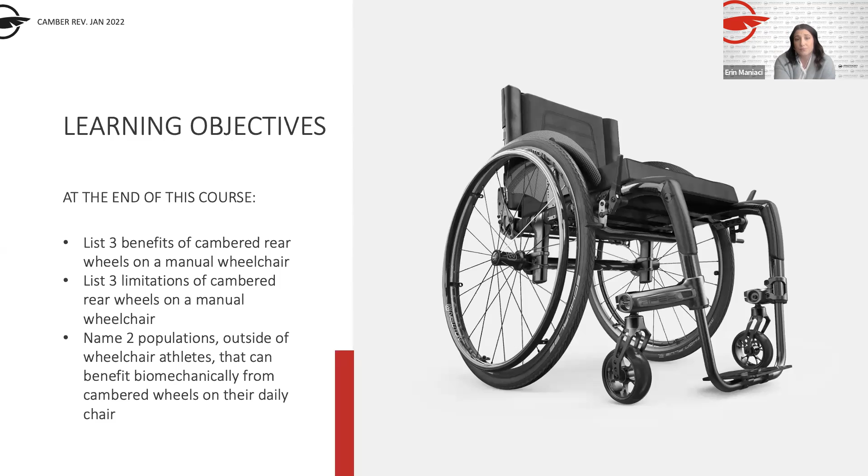So combining those with the patient value and the individual client need is going to bring the best practice for our client, specifically today in wheelchair prescription. So just want to know that everything we present today is rooted in research and evidence. But we want you to be able to extrapolate what you need from this information and apply it to your individual setting.

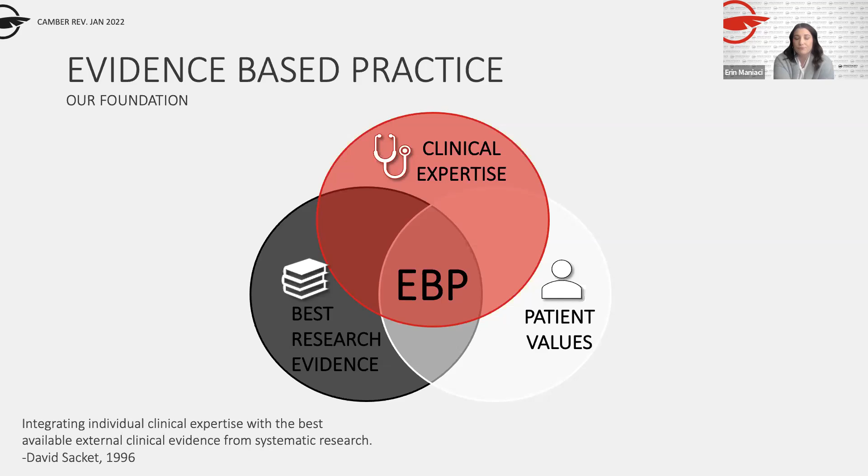So before we dive into Camber, everything that we're talking about is really to improve efficiency of the client in the manual wheelchair. And for the purpose of today's presentation, we want to assume that we already have a properly configured manual wheelchair. So that is in regards to width and depth. The seating is really honed in, the positioning of the rear wheel, the seat to floor height, caster size, all of those things we really have dialed into a particular client.

And then we're going to introduce Camber as another topic. It is just one component that plays into proper configuration, and we're well aware of that. So today we're just giving you some tidbits on how to interject Camber into that conversation. Okay, so seat slope, back angle, all of those things are really dialed in. And we're always thinking about shoulder health, shoulder preservation, upper extremity preservation when we're talking about manual wheelchair users. So the setup is very, very important, and Camber is just a piece of that.

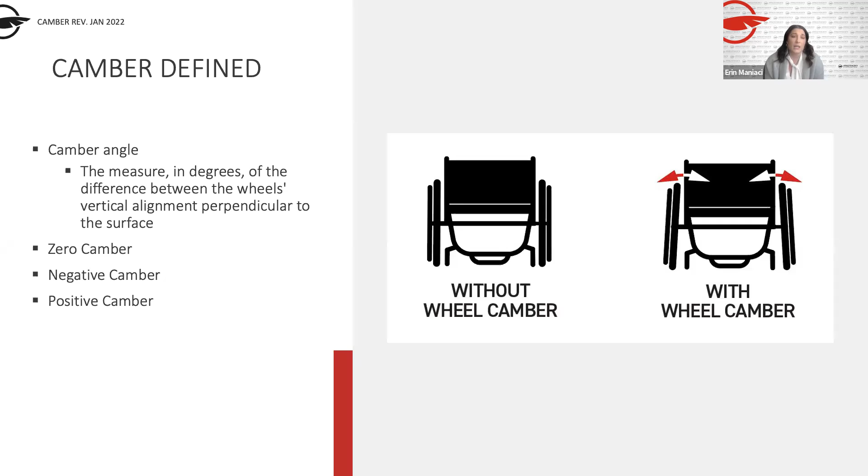In other industries, they will use what is called positive camber, and we'll get into that here. So negative camber is used in our industry in wheelchairs. It's also used in the automotive racing industry. Positive camber is used in all-terrain vehicles, construction equipment, really all to say that those different industries are going to use it to their mechanical advantage, to biomechanical advantage in our case.

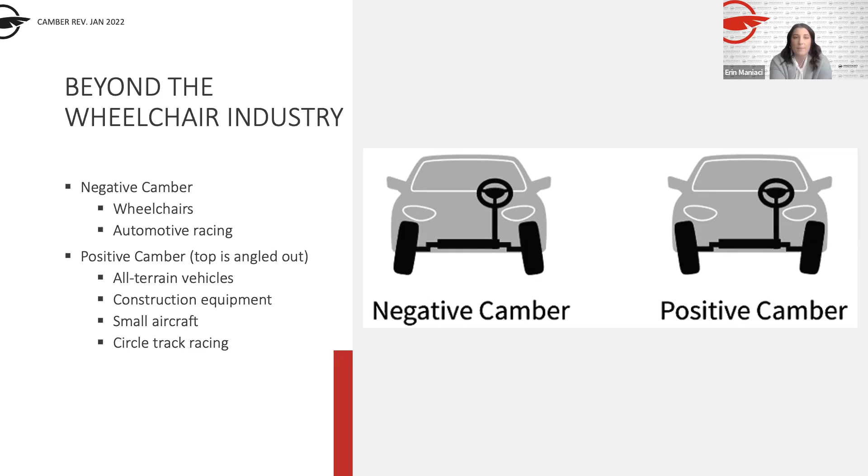Some people want less friction, some people want more friction. We can get into the physics of that, but not today, not during this hour. But just realize that when we are talking about our industry in wheelchairs, we're actually speaking of negative camber, even though the degrees are displayed positively, it's actually negative.

So within our industry, speaking in general terms, if camber is new to you or manual wheelchair prescription is new to you, everyday wheelchairs, kind of that average for a folding chair, can range from 0 to 6 degrees. Rigid chairs can range from 0 to 8 degrees. 2 to 3 degrees is common for an average user. Sports wheelchairs will go to that more dramatic camber angle, 15 to 24 degrees. Today, again, we're going to really focus on that everyday user.

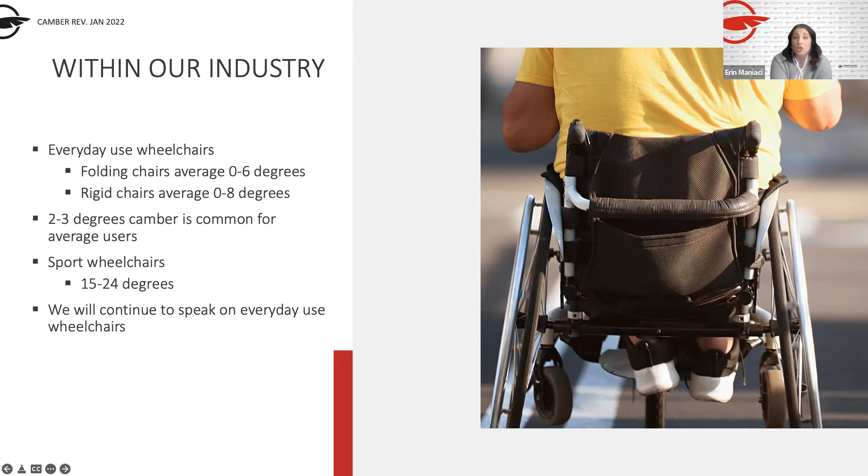But know that different manufacturers have different degrees of camber. Even though they range from 0 to 6, 0 to 8, some chairs are non-adjustable, so you pick your exact degree you want. Some of those ultralight wheelchairs are going to be adjustable, so you can adjust that camber down the line if you need. Some are going to come in even increments, some in odd increments. It really just depends on the manufacturer. So knowing exactly what you're dealing with when you are prescribing is important.

So, can camber be added to my client's wheelchair? First, not all categories of wheelchair have camber as an option. In the United States, we refer to it as a K5, ultra lightweight manual wheelchairs; they're the only chair that you can have camber on. For any of those lower level manual wheelchairs, camber is not an option. That's where you can start getting into the funding conversation. If you do need camber and want to utilize it for your client, we can use that as a funding argument, and we'll get into that later.

Again, not all wheelchairs can be modified after delivery if you don't have that adjustable option, but some models have adjustable options, so you can add that later. This can help you and your client decide what manufacturer to go with. If they don't know for sure and might want to add camber later, go with something that is adjustable down the line. Otherwise, maybe this is their third or fourth chair, they're super dialed into what they need for their function, so they know exactly what camber angle they want and don't need an adjustable option.

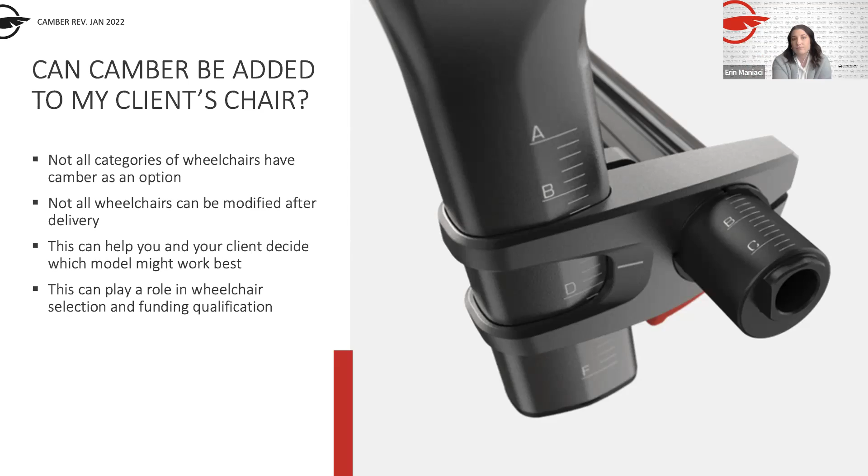So when you are talking about adjusting camber, ask your manufacturers what their options are, especially if they come in for a lunch and learn or you have a relationship with that sales rep. Ask them, is it easy or hard? What additional tools or parts may I need to adjust camber on these chairs? Manufacturers are going to have schematics and images like this on their website to help techs in the industry interchange camber tubes and plugs.

It's going to differ between the foldable and the rigid wheelchair. With a foldable, you can adjust camber through the axle plate or the axle receiver, whereas on a rigid wheelchair, they might adjust through a plug or an insert into the camber tube, or they might have you replace the entire camber tube itself. Again, manufacturers differ, and knowing the difference can help you decide what's best for your client.

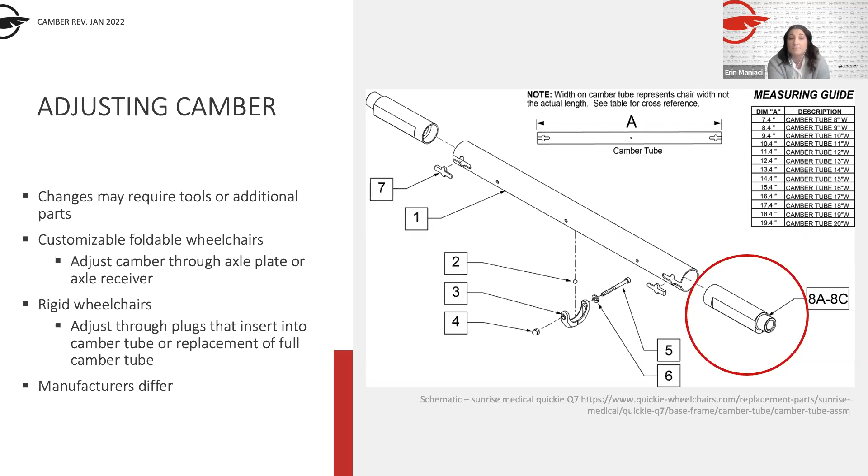So let's get into some of the benefits of camber now that we have defined it. Camber is going to give you an increased mechanical advantage. It puts that hand rim at a better position for a more natural push stroke by the user. It allows them to push down and out, so it improved body mechanics with that push.

We are in the business, if we're talking manual wheelchairs, ultra lightweight manual wheelchairs, of prevention of upper extremity injuries. We want to prevent that injury from occurring, knowing that almost 100% of manual wheelchair users, as research tells us, are going to be dealing with an upper extremity injury, shoulder injury at some point or another. So the more that we can improve mechanical advantage, improve body mechanics from the start, the better off we're going to be as we go.

We want more fluid motion with the upper extremities. We want to do proper training for propulsion to reduce shoulder strain over time. The camber and that angle is also going to just decrease overall shoulder abduction because it brings that wheel closer into the user. So the more things we can do to increase mechanical advantage, the better. Lots of benefits there. Increased efficiency noted as well.

So rolling resistance is going to be reduced, increased turning efficiency, especially at those high speeds, keeps your tire and your rim in alignment when you have camber. Thin, high performance tires are going to perform better with camber than a knobby tire or a thicker tire. This is something that we can certainly touch on as well. You know, camber is one aspect of component selection, but so are tires, so are hand rims, so are wheels.

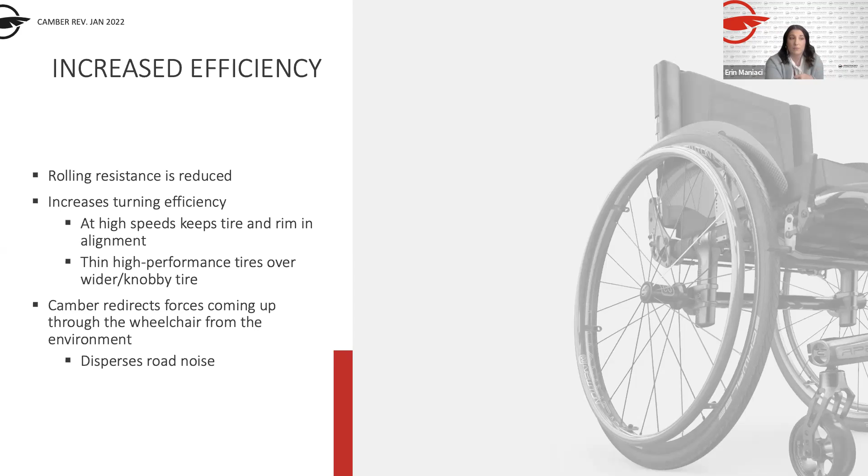As you get up above 9 degrees, then you can start getting a little bit more increased resistance, and that gets you kind of more into that sports world. But clinically, asking yourself, what kind of environment are they traversing? Carpets, tile, uneven ground, all of those are great questions to be asking when you're selecting camber or tires for that matter.

Another great clinical benefit is hand protection. And I think this is something that isn't really necessarily in the research, but certainly brought to our attention by end users and by clients. Because the bottom of the wheel is wider, it's going to contact a lateral obstacle before the user's hand and fingers. So a narrow doorway is a perfect example of this. That's going to save their hands.

Let's think about hand protection in terms of geriatrics, people with decreased sensation, just an average user with a history of injury. So those are great things to think about. And of course, in our geriatric population, our skin integrity isn't going to be as great as it once was. But also just thinking about our user and our client, they're relying on their hands for everything, propulsion, all of their ADLs, all of their movement throughout the day.

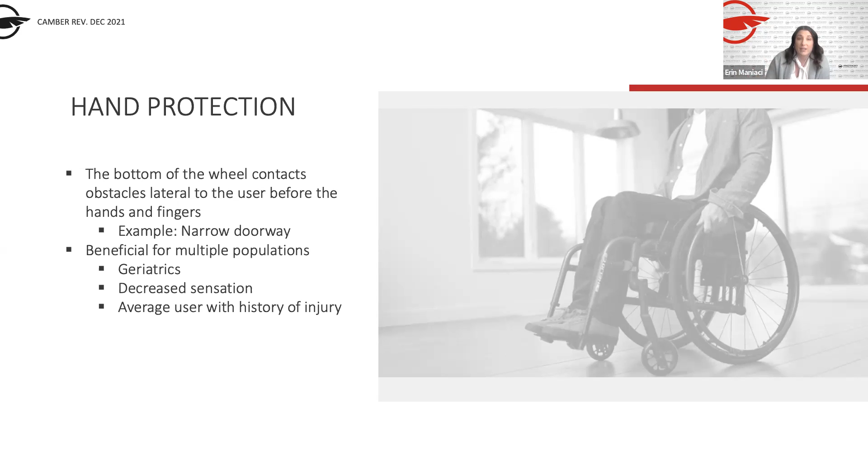So bumping their hand or having a cut or a bruise, that's going to affect them so much more than it would an able-bodied person. So hand protection is super important for these folks, and camber can give them that benefit.

Another benefit of camber is improved stability. It increases the lateral stability because it increases the overall footprint of the wheelchair in the width of the chair. So you can improve your navigation over lateral slopes or traversing lateral terrain. It improves your handling during frequent sideways movements. If you're, say, going up a steep slope and you need to take a rest, you can turn sideways without feeling like the chair is going to tip over.

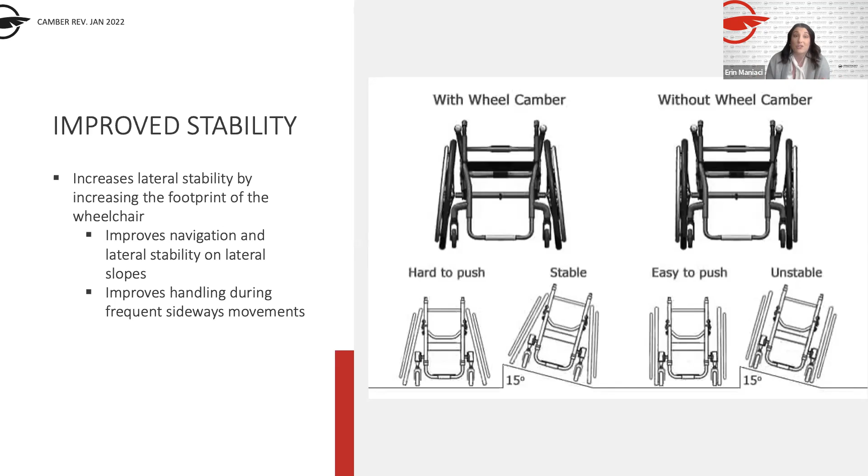But this brings up, obviously, probably the number one limitation of camber, right? The increased width. So that will lead us right into our limitations. Number one, increases overall width. So you can basically bet you're approximately gaining an inch for every 2 degrees of camber that you select. The overall bottom, again, is going to increase, not necessarily the top of the chair, but the bottom footprint's going to increase.

And then manufacturers sometimes will have what we call a width calculator or something similar to that effect on their website. So you can type in exactly the dimensions of your chair, and Christy will get into this later, but it can show your client, this is the things we've selected, this is how wide your chair is going to be, and then you have an exact number and they can go measure things in their home if they need to.

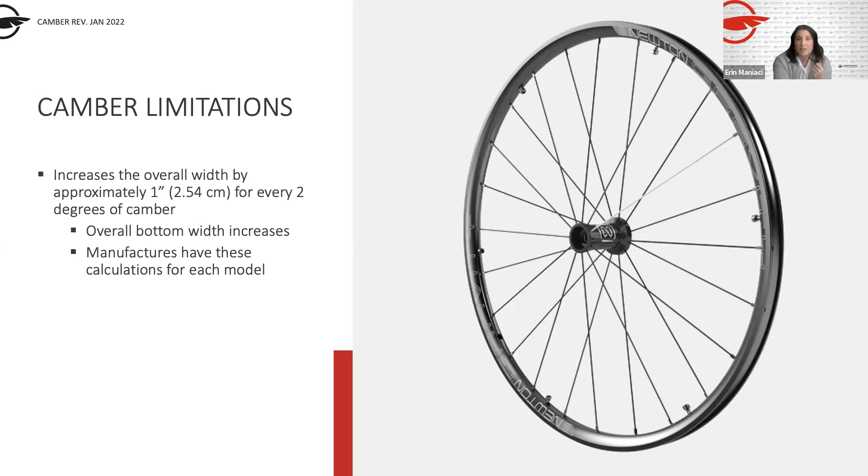Another limitation: excessive camber may cause the wheels to rub against other components of the chair, like the armrest or the side guards. So depending on how significant your angle with camber is going to be, know what other components you've selected to know if it's going to rub or get in the way of other components on the chair. As an ATP, you certainly want to recognize these things.

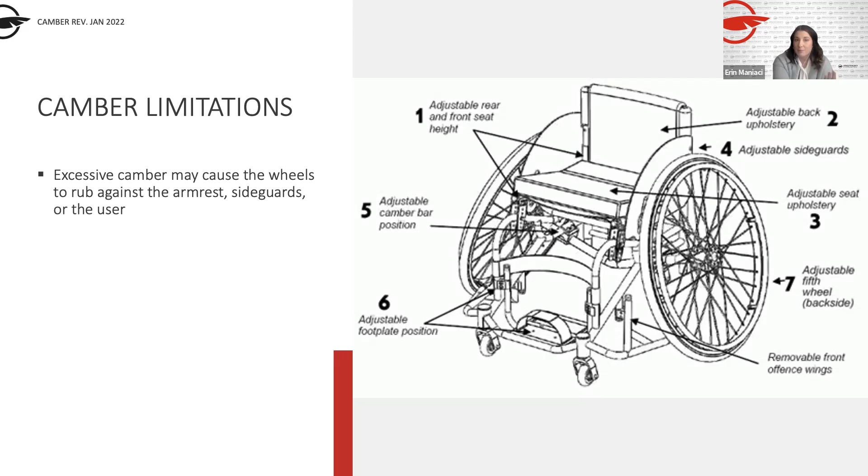As a therapist, you may not know the exact dimensions of everything, but manufacturers can also flag this as, hey, your camber angle is a little bit more significant than we've seen. So you may have issues with this particular armrest or this particular side guard. So the more you prescribe certain manufacturers' chairs, the more comfortable you'll get with knowing these types of things.

Another limitation, and we touched on this, is decreased surface contact area between the tread of the tire and the road. So sometimes you might want this, but sometimes this can become a limitation. So reduced traction, depending on the type of tire that you have and the degree of camber, can be harmful for some end users. It can also cause uneven wear on the medial side of the tire. It reduces overall traction. It can cause sinking into soft terrain.

So again, you're just having those conversations with your client. What type of terrain, what type of ground are you going to be going over? Knowing that more camber may actually limit them in certain areas. And if they're not going to be doing any of those soft terrain or things like that, adding a little bit more camber may be beneficial to them.

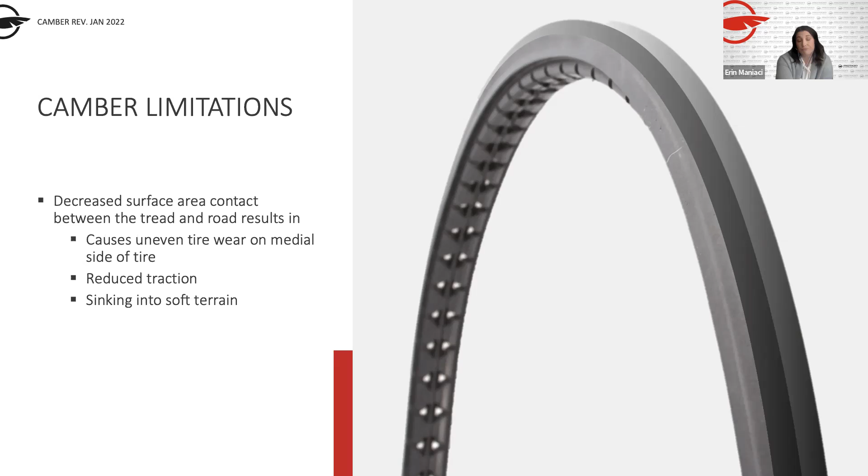Something that we really want to take our time on today and put out into our wheelchair industry is toe in and toe out. And we're specifically talking about wheel alignment here. This is something that is only applicable to a cambered wheel. So if you have zero camber, you aren't worried about toe in and toe out. So we'll define it and show you what it might look like clinically, to notice maybe I need to mess with the toe in, toe out and really pay attention to the wheel alignment.

But wheel alignment, as defined, is the parallelism of the wheels between them and that central line of the chair as viewed from the top. So we are looking at a bird's eye view of these 3 chairs here, A, B, and C. That dashed line through the middle is going to be the central line of the chair. So if both wheels and the central line are parallel, then you have no toe, and that's optimal for performance. It's when you get toe in or toe out that efficiency can be harmed.

What might this look like clinically? How do I sniff this out if I have a client that comes in and is saying things like, I hear something audible when I'm rolling across the floor, I have some scrub when I'm propelling. If you have any toe in or toe out, they might describe it as they can feel some drag. So this is one of the biggest adjustments that we can make for performance of the chair. Maybe your client isn't really that active, but they keep coming in and their tire is worn out very unevenly.

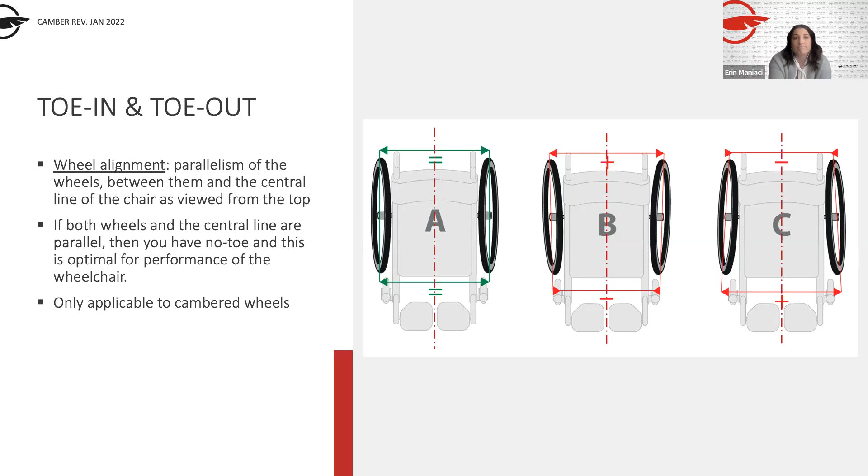So let's get into a little bit more definition. So this is an example of no toe. The distance between the rear of the tires and the front of the tires are equal. They might say rear wheel parallelism. That is very difficult to say. Proud of myself there. And it's really defined as within 6 millimeters. That can be categorized as no toe.

But if you talk to an end user, if you talk to a client, that typical distance between the two is like a hair of a toe in. So 1/32 of an inch, less than a millimeter. Okay. So very, very close to equal. 6 millimeters gives you kind of a wide range. But the central axis of the chair, that dashed line, that can be really hard to measure, especially with all the different components that we put on the chair.

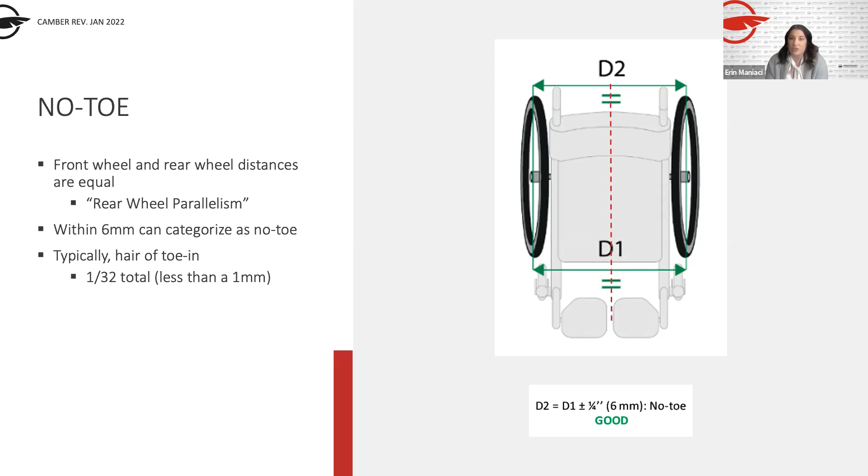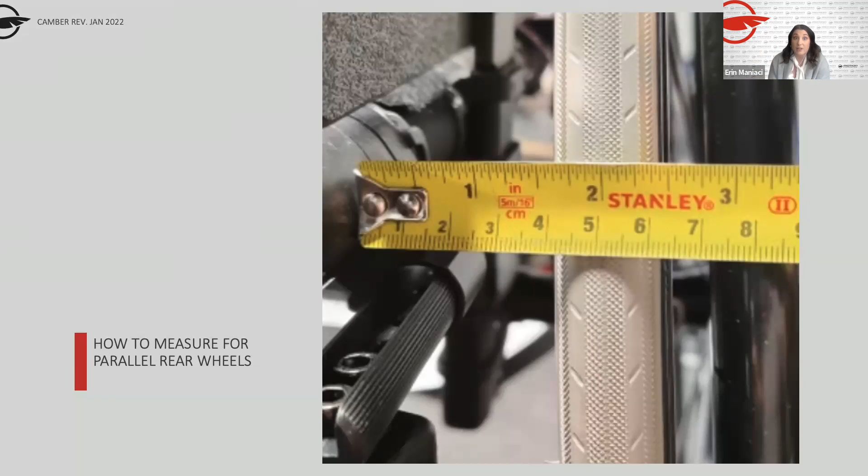So many will actually measure from the outer edge of the frame to the inside of the tire to compare the distances that way. So we have a picture here out in the field. If you're like, okay, how do I measure for toe in, toe out? This is a great way to do it. Again, outer edge of the frame to the inner edge of the wheel. You're measuring the front and the rear, and then you're doing the same on the left and the right sides. You're comparing left and right sides. And again, you want those to be as equal as possible, front to back.

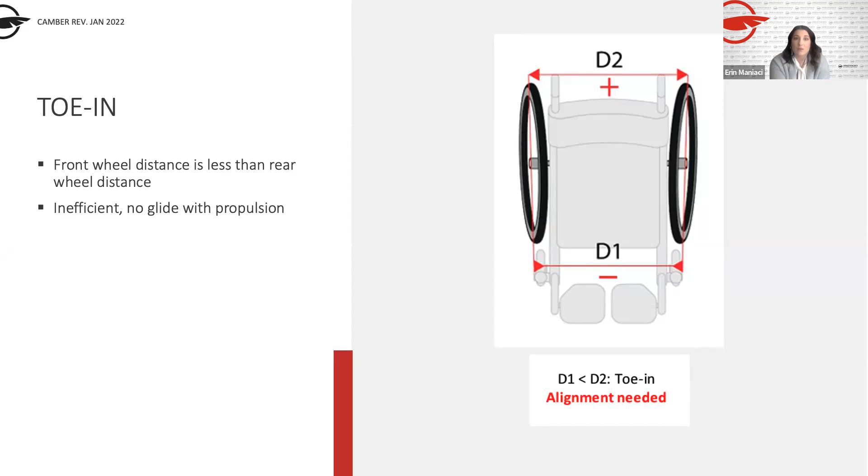When somebody's experiencing toe in, that means the front wheel distance is less than the rear wheel distance. This is inefficient. There's going to be no glide with propulsion. But if you're messing with alignment and you're going to err, you would want to err on the side of having a little bit of toe in over toe out. Toe out is just the opposite. So the front wheel distance is greater than the rear wheel distance.

And this picture, I think, does a really good job of showing that, because we can see the inside of the rim here on the back of the wheel. And ideally, the tire, this front tire, would be covering up the inside of the rim here. That would be an example of no toe. So here we're seeing toe out, definitely more inefficient than toe in. It's the slowest of the two. You're going to get the most drag, no glide with propulsion again.

But let's talk about toe out maybe in a little bit different light. So even if you have no toe, toe out can occur naturally when an end user or when your client is doing a wheelie. So a wheelie is a very normal wheelchair skill that your client may use when they're traversing down a hill. So going down big hills, not only does that wheelie provide some assistance with their trunk, and maybe they feel better doing the wheelie so they are not falling forward going down the hill, but it's also actually giving them a little bit of toe out. So that can be an advantage when traversing down a hill.

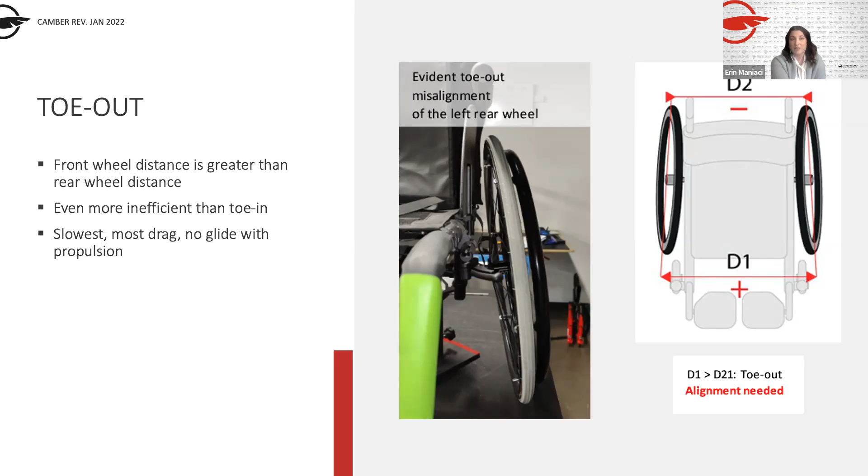And this just kind of gives you a background as to why that might help. So toe out is going to give you that added benefit of braking, giving you a braking effect to control your speed with descent. So even if you don't have toe out when you are looking at your alignment very carefully, toe out can occur naturally with a wheelie. And you might even educate your client to do that, to get some toe out for the braking effect.

So ensuring alignment, if you have a folding wheelchair, if you have a rigid wheelchair, and also again, depending on the manufacturers, it's all going to vary. For a folding wheelchair, ensuring that the axle bushings are the same length bilaterally. For a rigid wheelchair, ensuring that the camber tube is again symmetrical, looking at the axle bushings on that chair as well. You want to make sure they're the same length bilaterally.

Here we have just some pictures of what the camber tubes might look like when you're installing. Again, manufacturers will have technical manuals and instruction sheets on their websites to give you a very detailed description of how to realign their unique parts. But just a caveat, I would not mess with this if you're very new to alignment. I definitely leave this up to a dealer or somebody who knows their way around rear wheel alignment, because it can just be so specific. And if it's off, the client's really going to notice.

So with your plugs, if you're changing out a camber plug, they recommend changing one at a time, aligning one with the chair center line. Again, that dotted line that we showed visually a couple slides ago. As long as one is in alignment, then at least that one will stay consistent to avoid pulling to one side. So they recommend not doing both at once.

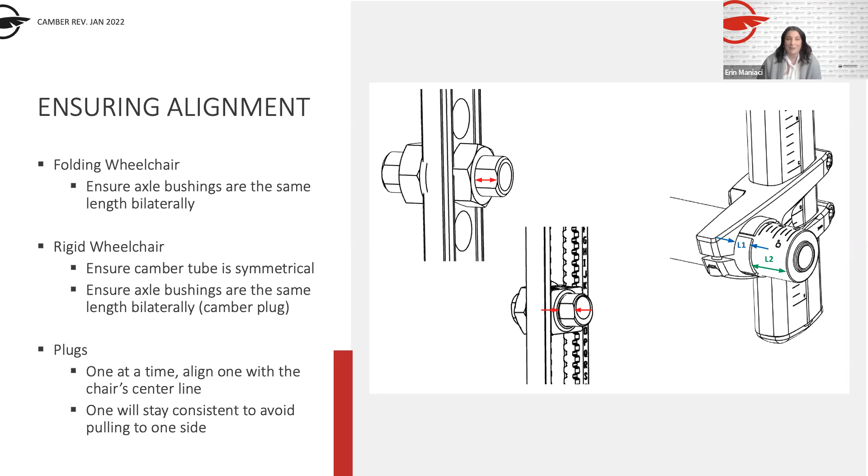So I'm going to hand it off to Christie. She's going to talk a little bit more about some science stuff. I know we did a lot of defining in my portion, but then she's going to talk a little bit more about reality and how we can apply this to our end user. So thank you so much.

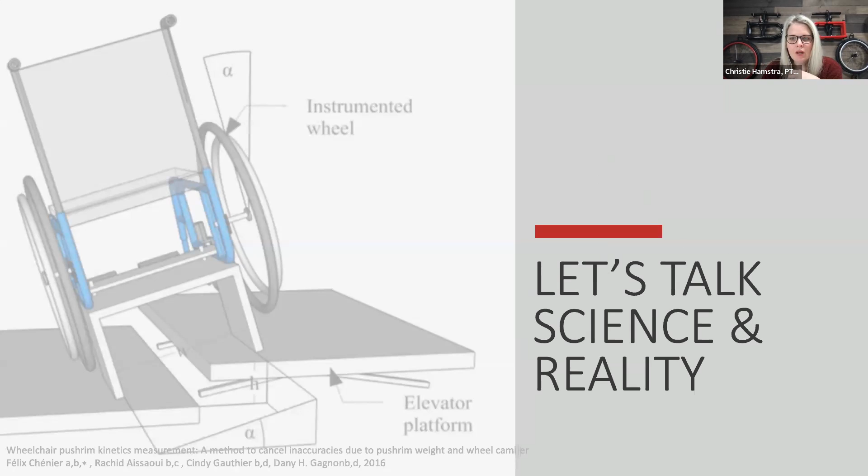Thank you for giving us all that information, Erin. We're going to look at some of the real world examples of what we're doing now that we've gone through a lot of what is out there in camber. So we spent a lot of time looking at benefits and limitations, trying to figure out camber for everyday chairs, right? So we can say that there's improved mechanical advantage, improved efficiency, improved stability. A lot of this is coming from the research that's been done on athletes, okay?

There is limited research on camber in everyday chairs. So then you're asking, okay, you said you're research-based, where did you get your research from? Well, it has to be extrapolated, right? We do that because there isn't always something specifically researched on the process that we're doing. And so it's important to see what is out there and read it with some discretion. A lot of the studies consist of subjects that are either able-bodied or wheelchair athletes, or they have a very small number of participants.

So if there's any researchers out there that are like, hey, I want to do something on wheelchairs and camber grabs your fancy, go right ahead, message us afterwards. I'm sure we can hook you up with somebody willing to do some research looking at camber specifically.

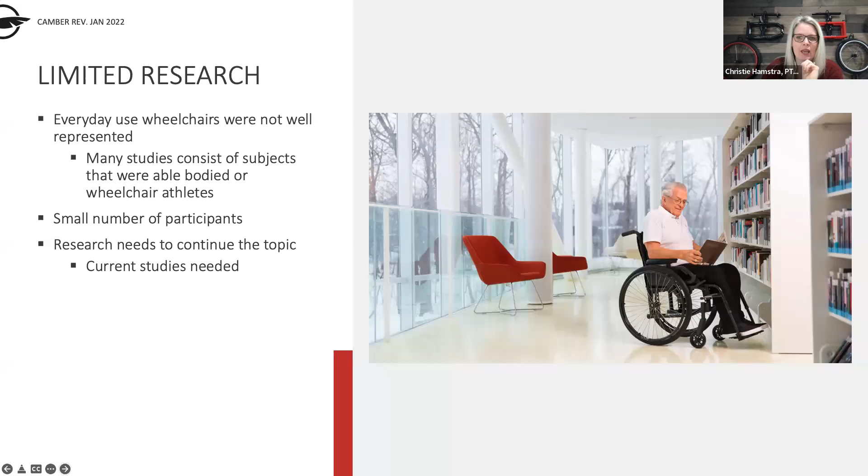Okay, so one of the main studies that looked at camber in everyday chairs is this one here that we're just going to discuss briefly. Again, I don't consider myself a researcher, but we're just trying to discuss what is out there so that we can help our clients make the best decision that we can. And I like this one because they did use disabled experienced wheelchair users, non-disabled experienced wheelchair users, and then non-disabled inexperienced.

So there was a wide variety. They looked at 0, 3, and 6 degrees of camber. They had them rate stability, maneuverability, comfort, overall preference. And it was very interesting to see. They also had the clients do ratings of perceived exertion and looking at VO2. And so they didn't find any differences in those cases. So they didn't see any differences in ratings of perceived exertion or in their oxygen uptake.

Everyone said that they liked 6 degrees of camber. So it really came down to patient preference. And so I think, when you're not dealing with a lot of increase in rolling resistance, we're not going over that 9 degrees, it's okay to maybe let our clients try a few and decide what works for them. Before you get all up in arms, I promise you, I'm not saying that every supplier and every rehab facility has to have 6 different chairs with 1, 2, 3, 4, 5, 6 degrees of camber.

So we're going to start with who benefits from camber. So Erin did a great job of going through the benefits and the limitations. And we really want to see who's going to benefit from that. Okay, so the next several slides are a little bit more wordy, but we're leaving it there so that you can have it as a resource to help you maybe justify for a specific population. But who does benefit? We've got the average user. In a minute, we're going to really look at that average user and kind of dive into that terminology.

The athlete, I think it's pretty obvious. Anyone who thinks of camber, I think first of all, of athletes. The aging client, I think often underserved could be the aging client, especially in this ultra lightweight manual wheelchair category. The pediatric client, we'll talk a little bit about that. And then the pear-shaped client, quite typically a female client, but again, just a pear-shaped client. So we want to look at all of that and see how each one of these different populations can benefit from adding a little bit of camber into their wheelchair.

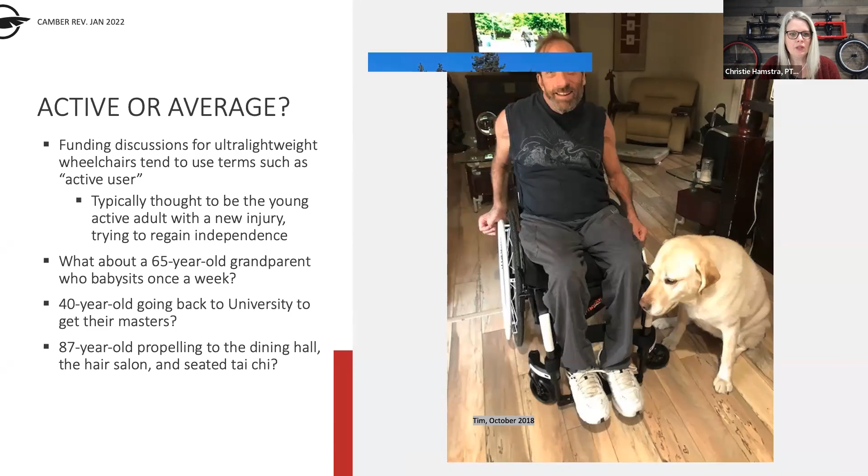I do think sometimes, maybe not us, but often our funding sources hold wheelchair users to a higher standard for what they consider active. And I think we need to continue to advocate and push so that our clients have better access to the equipment that's going to help them. Soapbox, I apologize. So then let's talk about athletes.

Okay, so you start getting into that 15 to 24 degrees of camber. It's typically seen on athletes' wheelchairs. So there's greater forces. So the same benefits and limitations don't apply. But let's come back and critique it, right? Let's do some constructive criticism on it.

The greater forces on the upper extremity and the greater energy expenditure they have to put out doesn't really matter as much, because they're only using the chair for a specific amount of time, for a specific activity, for a specific purpose. So yes, it is going to be higher forces in the upper extremity when you've got the chair out at 24 degrees. But they have trainers and professionals and all these

biomechanical engineers. There it is. It just wasn't coming out.

Sorry. And so they're looking at this, and this is why everyday chairs are not sports chairs. Understand that athletes' chairs are very sports specific. Your client who's playing a court sport like basketball or tennis is not going to be the same as if they're doing track and field or racing. And we are not here to talk to you about what is recommended for athletes' chairs. We're here to talk about everyday chairs, but it is a population there, and we want to ensure that we are giving them their time.

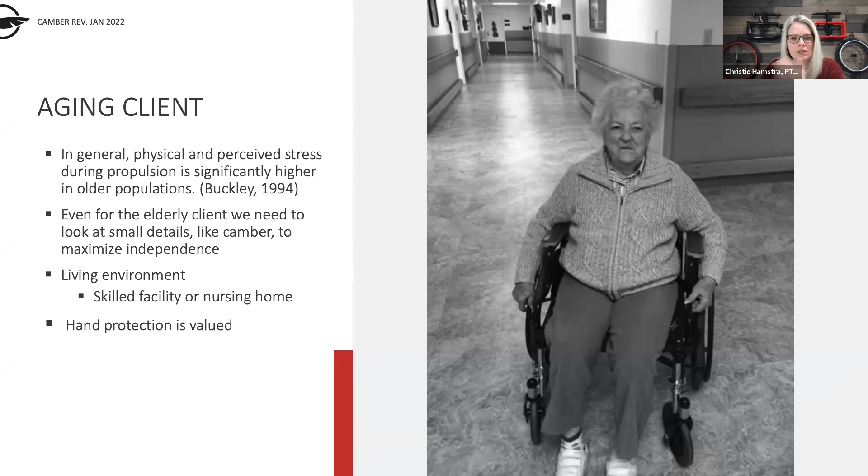But again, let's just think about all of these things as we continue to move. So this is our geriatric client. Now let's talk about pediatrics. We're going to swing back to the other end.

We could have many conversations about making a chair that grows with the child versus fitting the child. But let's just bring it back to every bit of additional width that you're building into that chair for that kid to grow into is making them less efficient with their propulsion, right? Because their arms are coming out, they're in more of an abducted position. So they can start losing their propulsion efficiency up to 10% for every additional inch that we're putting in there.

So camber, if you add in some camber, it's going to allow them to have better access to those wheels. And think about it, you can add a little bit more camber into maybe a pediatric wheelchair because they're already smaller to begin with. So doorway access, some of that isn't as much of an issue. Another thing that we think about with pediatrics is turning. Sometimes it's challenging for young self-propellers to learn and figure out how to turn. So having those wheels in a cambered position to make it not only easier to access, but easier for turning is going to be very, very important.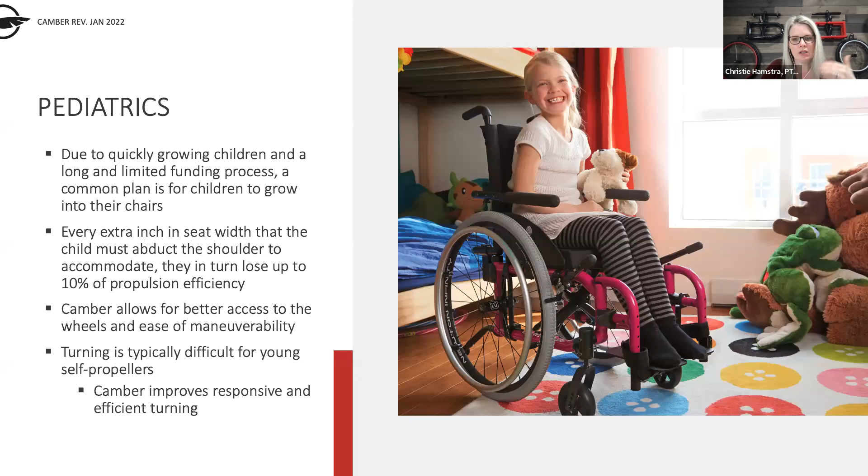So we have to be careful with this, right? Because again, while we are trying to bring the hand rims in so that the client has a better position so they're not out here, we also have to understand that we are widening it at the base. So you have to make sure that you're using all of the tools that are out there with manufacturers, et cetera, to ensure that you're getting the best possible setup without being too wide for their environment. So again, keeping that in mind as you look at specifically gender and body composition.

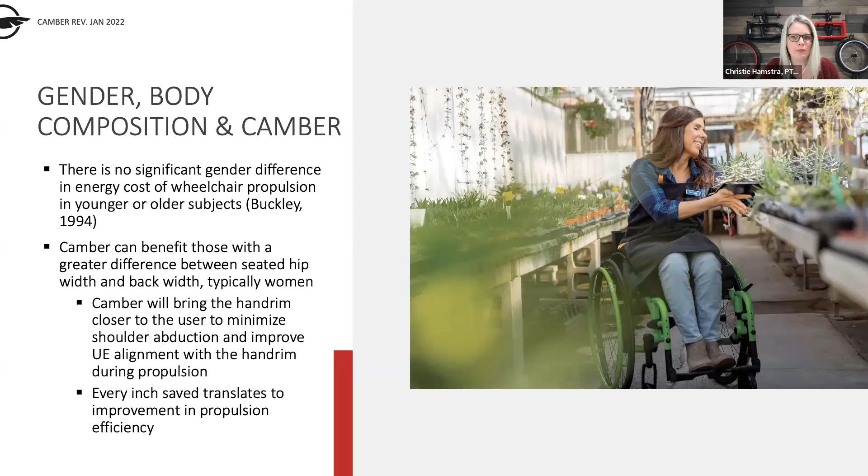So let's kind of break it down. We looked at some specific populations, but when we're in that wheelchair evaluation, what are the real considerations when we're selecting camber? So I think we've really hit on ease of propulsion, right? And upper extremity alignment with the hand rim. So again, getting those wheels in closer, getting a better, more efficient propulsion pattern is really going to be good.

That lateral traversing and inclines. I'm going to give you an example of one of our end users who shared some stuff with us specifically about that. But again, turning on inclines, ensuring that they're going to feel stable and they're going to be able to do all of the things that they want to in that environment.

Client preference. The one study that we looked at with everyday users really said it came down to client preference. And this will also come down to manufacturer preference. Well, maybe my preference is 3, but the manufacturer I work for or that I'm selecting has 2 and 4, right? Or maybe I want 2 and I'm only allowed to have 3. So again, understanding that client preference is one thing.

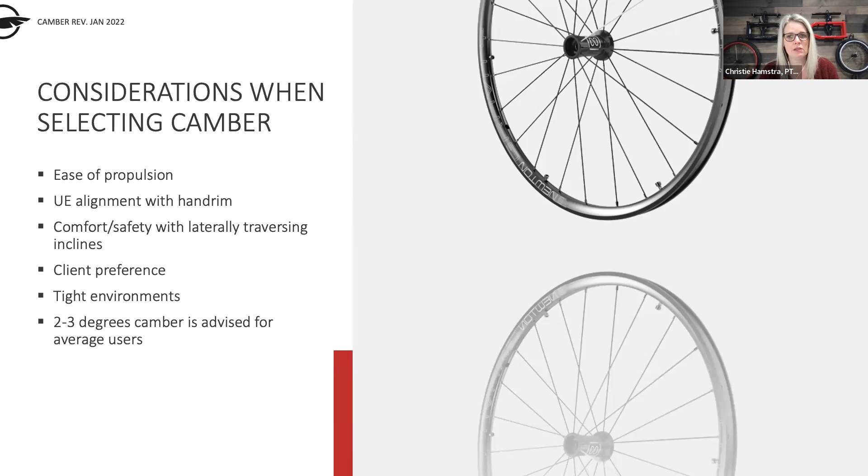2 to 3 degrees of camber is kind of the average, what a lot of people will tell you, a lot of ATPs who've worked in the industry, a lot of ATPs who are users who have been in the industry for a long time, that's what they'll say. But you also have to look at tight environments. And so camber, while it's going to be great for maneuvering, if you are in a really, really tight space, maybe that little bit of camber is going to make your chair too wide for that space. So we can talk about that here in just a minute as well.

So client education and trials. Again, I don't want any ATPs that are in here to start getting upset when I say we should have some to try. That's not what I'm saying.

When I was speaking with an ATP colleague as we were building this presentation, and I said, here's the name of the presentation, he goes, oh, so you're going to talk about how 1 degree is great, and then 2 degrees is great, and then 3 degrees is great, and then 4 degrees? I said, absolutely not. I think people would be like, please stop. I'm going to watch paint dry.

But we need to teach our clients the benefits and the limitations, right? And then look at what the different manufacturers offer. Again, do you want 2, 4, 6 or do you want 0, 3, 6, 9? How do you want that to work? So again, looking at the different manufacturers. Are they going to be making changes often? How is that going to be maintained? These are all very important things, and they do differ by manufacturers.

And each one is going to have something, whether it's on their website, whether it's in your login portal, to have different types of documentation and things to help your client be able to realize how you make those changes. Measuring the chair. This is very important. If you are not able to try that chair and you're not able to know exactly what that is going to be, either measure it or see if there's a tool out there for you to be able to have.

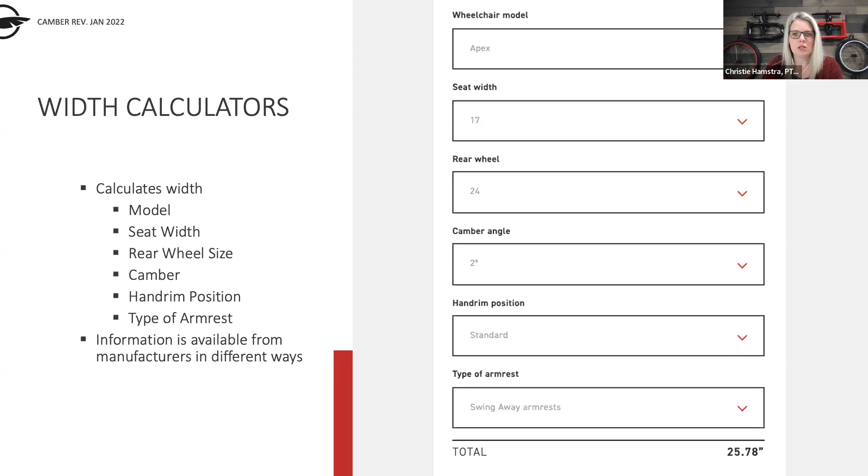Funding. I sat through an hour of funding this morning. We could talk funding all day and still probably not get through all of the questions that people have. But just remember that camber isn't available on lower level chairs. So whether it's a type 1, if you're in Ontario, whether it's a K1 through a K4, camber is not available on these. You can use it in your letter of medical necessity as a justification for your ultra lightweight

chair. And if you think specifically about Medicare in the United States, and that a lot of funding sources and a lot of insurance companies use Medicare as their example, camber is one of only 4 adjustable components. That's a justification for a K5. So if the environment, if the function of your client lends itself to camber, you have some justification for your ultra lightweight chair. And I think that is really, really good.

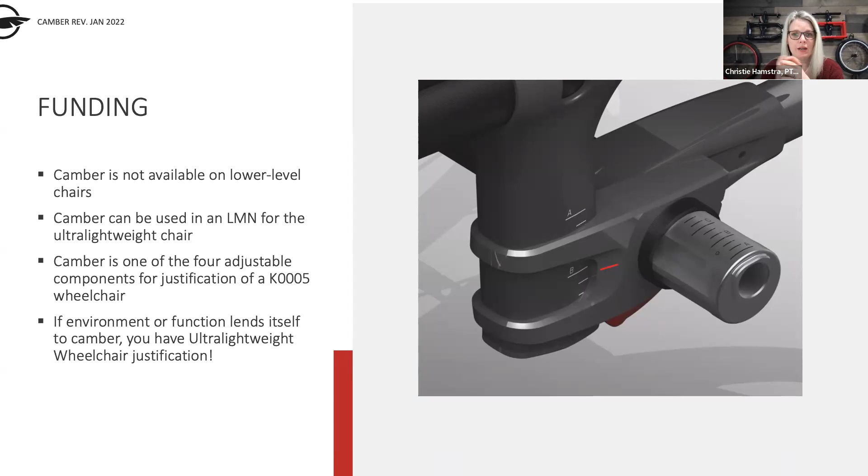So as we finish up here, I spoke with a couple end users because I think it's much better. If we were in person, we would invite you to come up and try 2 chairs side by side, one with camber, one without, so you could try it yourself, maybe next year, maybe for your next in-service. But let's meet, first of all, Chris Collin. Chris Collin is one of my colleagues. And again, we were just having a conversation. He said that he's used 0, 2, and 3 degrees of camber, both currently and in his previous chairs.

He liked 0. So here, let's talk about tight fitting. He liked 0 on his 15-inch wide chair because he could fit almost anywhere, but he didn't have the lateral stability. He liked that because he could go into a regular restroom stall in a 15-inch wide chair. But he talks about how turning is substantially easier with camber. The biggest drawback is that toe in, toe out, which Aaron really gave us a good overview of. But for Chris, the improved performance that he gets with this 2 to 3 degrees of camber makes it worth having to really be fine tuning with the alignment.

And so Aaron talked about going up slopes. So this was Chris going up an extremely high 2.5 mile incline that he did, and he had 3 degrees of camber in that chair. And he said every time he turned sideways to rest, he felt like he would have fallen right over had he not had that camber.

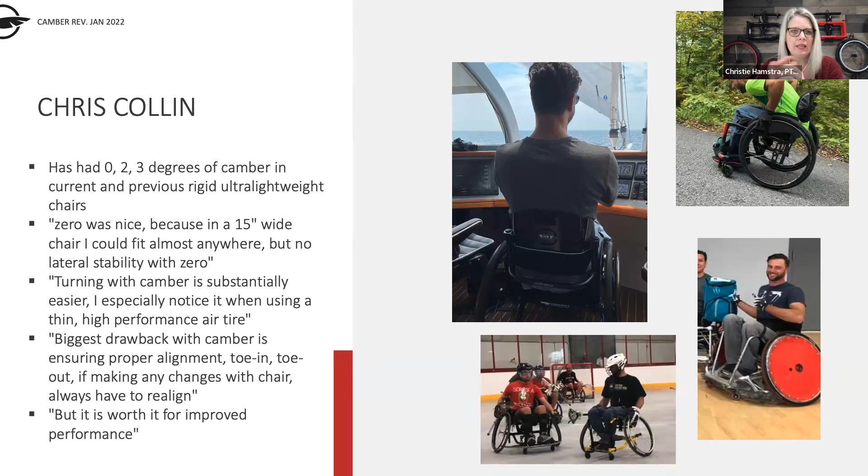Todd Richardson, another one of my colleagues, talks about how when he was first injured in the 80s, he had mag wheels with solid inserts, 0 degree camber, and he said that chair rolled like a tank. One of the things that he talked about, especially with active users, is when you have 0 and you go quickly and you go down to do a turn, there's a lot of forces acting on that, and it can roll your tire right off the rim. So again, 2 to 3 degrees of camber, he says, is that sweet spot. You can get the benefits and have improved turning, but still not as much toe in and toe out, which I think is really important.

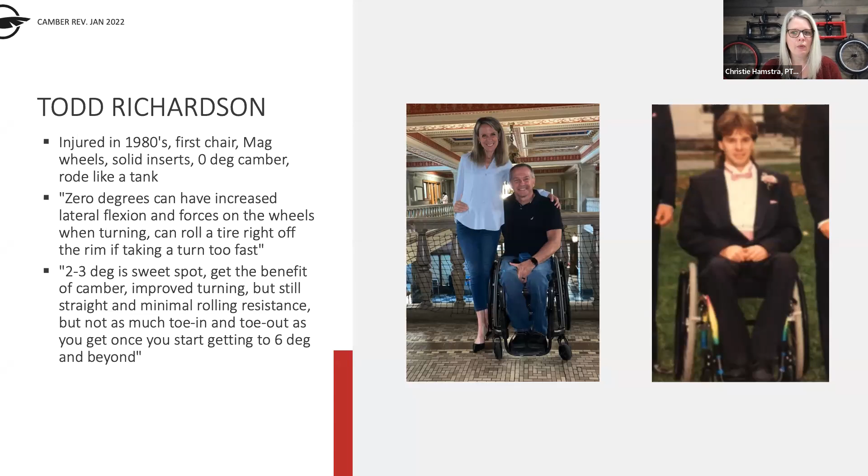And my final colleague that I spoke with is Jim Munson, and I loved his thing. He said back in the day, which of course we're not going to say when back in the day was, his everyday chair was his sports chair, right? And so they had to have camber, and they changed plugs and plates depending on the activities that they were doing. A lot of them would find this happy medium with 4 to 6 degrees of camber. But if you're in an 18-inch wide chair, 4 to 6 degrees of camber is going to really make that chair wider. Like Jim says, a whole lot of camber is not needed for your everyday chair, but center of gravity is very much the most important. But he also recommends 2 to 3 degrees of camber to allow for easier maneuverability.

And one thing about Jim, every time I've been through an evaluation or a teaching situation with Jim, he always talks about hand protection. He goes, Christie, it comes down to the fact that my hands don't hit the wall first. And I think that's fantastic.

So just here in our wrap up, and the next one has our resources. Again, the benefits and the limitations, I think we've very clearly put them out there. And remember the clients that can benefit; I think we've pretty much said almost anyone can benefit from it.

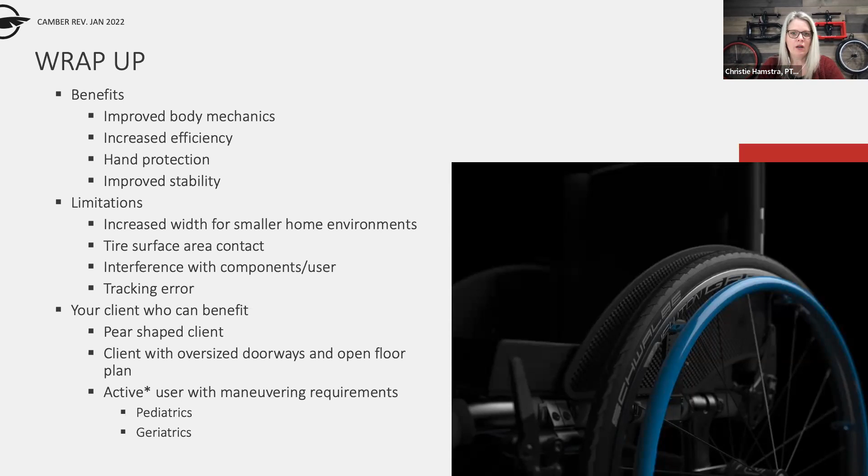Your pear-shaped client, your geriatric client, your pediatric client, but let's not forget about that active user and what does that mean? So we're coming to the end here. I think we're going to take some questions.